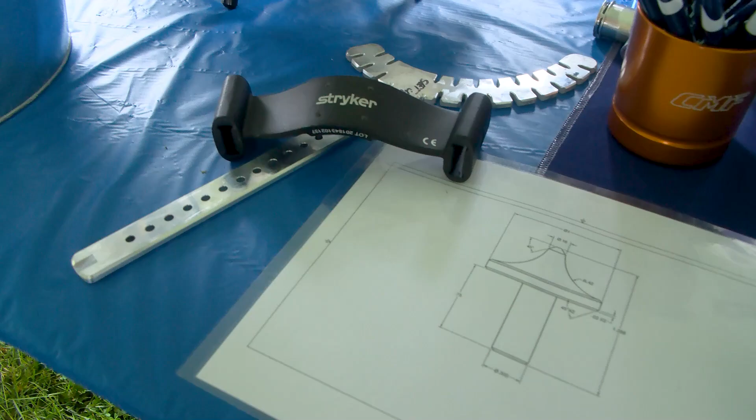Can you talk about some of the cool stuff you have here on the table? A lot of what we do is very tedious work. We do everything from Stryker with medical down to like Eaton Aerospace.

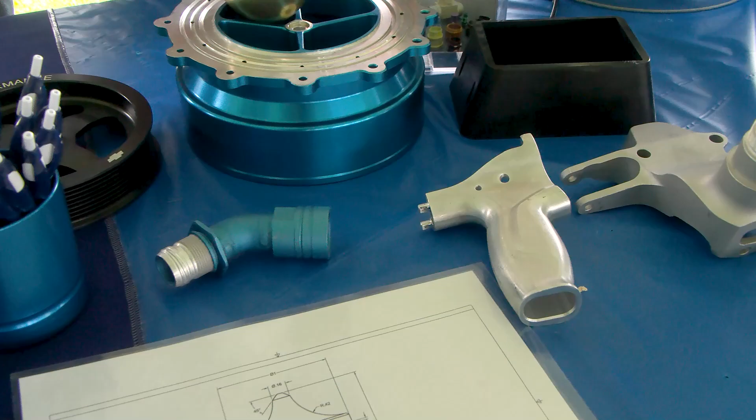Another cool company here is Jet Heat. We machine parts for their jet heaters, but we do a big variety of different parts for the companies we work for.

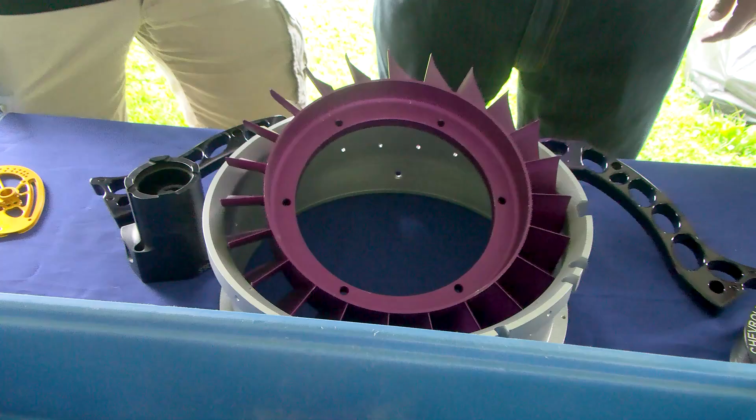Thanks, Colton. And now we are here with Mary from Technique. Mary, you want to tell us a little bit about yourself and Technique?

I've been with Technique for about 8 months now, and we are an emergency manufacturing and prototype facility. We work in metals. We have so many training opportunities at Technique. We are currently hiring for many positions. We're going to be opening a new facility at the end of the month and building a new facility in the spring.

How many people do you plan on hiring? Well, we've hired 50 in the last 2 months. We plan on hiring 50 more, I would say, in the next few months. We're hiring welders, machinists, prototype techs. We're looking for a CWI certified weld inspector.

So if you know of anyone, it's a great place to work. We have so many training opportunities. We pay for your training. We'll put you through our TechU academies. We hire high school students, juniors and seniors. Love to start you in a new manufacturing career.

So tell me, what makes it important for you to attend events like the Learning Fair? We love to introduce manufacturing to kids. I think a lot of the kids, especially in the urban areas here, aren't exposed to manufacturing, and they don't even know that this stuff exists.

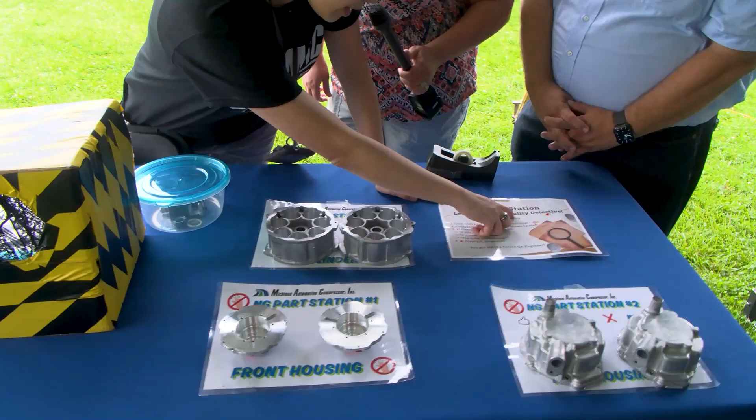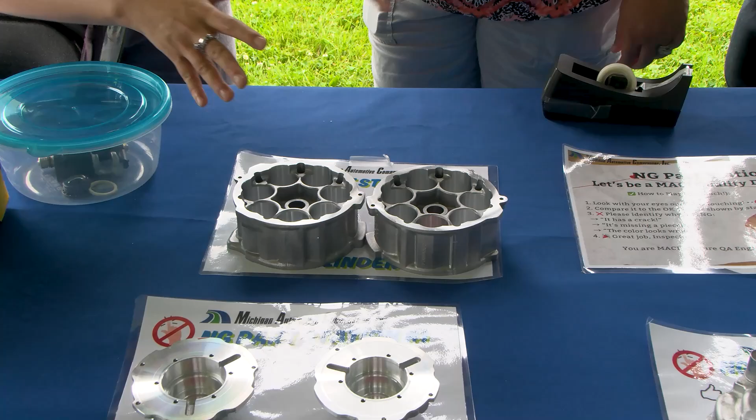Awesome, so I see you have some parts here. Are you able to tell us a little bit about what these parts are? Oh yeah, they are. This is a quality detective activity. One side is the bad part, which is no good, and the other side is the good part. So kids get to compare and identify why they are bad.

All right, Olivia, the real test is, can you choose which one of these parts is good or bad? So this is bad and this is good. Yeah, I was going to say this doesn't look great. Uh-oh. We get to hold up, welcome to MACT! I get to hold up the frame now, right?

Yeah, okay, so now she... and safety first. Uh-oh. Perfect. Well, thank you, thank you.

Thank you so much. We're here with Mark and Fred from the Model T Experience at the Learning Fair at Northwest Elementary. Gentlemen, thank you very much for agreeing to appear on our podcast. Welcome, yes. So could you tell us a little bit about what the Model T Experience is?

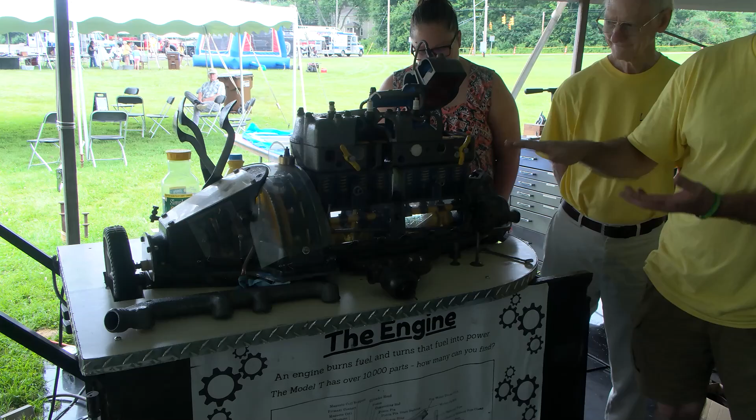What we're trying to do is teach children about manufacturing, building things through hands-on work from the original manufacturing device, the Model T. This is a real engine from a Model T, 1908. This is a 1909, right? Actually, this has got some parts from both of them, but it's a cutaway engine, the real thing, so you can see inside how an engine actually functions. A lot of people don't know how an engine functions, but it's really quite simple to relate to children.

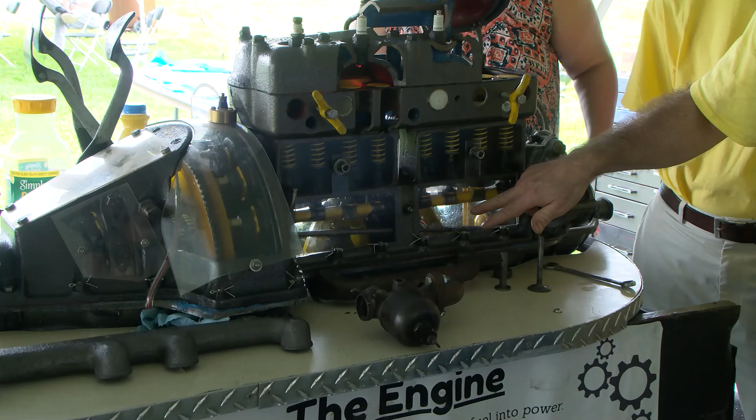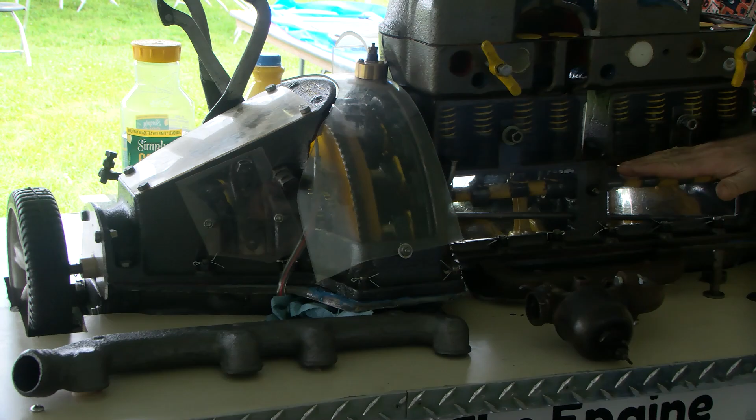If you look inside here, you've got that yellow part that's moving up and down, that's called the crankshaft. Children have generally ridden bicycles, so that would be the pedals of a bicycle. The pedals move up and down, spinning around, which eventually goes through the transmission to move the wheel. On a bicycle, you have a chain instead of a transmission, same concept. So if you think of this part as the bicycle, all of this is the rider, and this is where the power comes in.

So on this engine, it's 4 cylinders. We have one cylinder here, this piston, cylinder, cylinder, cylinder, and it's a 4-stroke, that's how it functions. We've got 4 steps in how it works. You start with step number 1, here we'll come around. This valve comes up, letting fuel and air in, and it closes, comes up, and the spark plug goes off, exploding the gasoline, pushing it down, like your foot would push down on the pedal. Come back around to here, step, bang, push, and then the exhaust comes out. Same as you, breathe in, breathe out, food in, waste products out.

Same function, and in fact, gasoline is a hydrocarbon. The food you eat are hydrocarbons, and you breathe out CO2, so does an engine. Plants eat the CO2, and it all cycles around. Now this has got lots of parts and moving parts, you can see things that are functioning and how it all works.

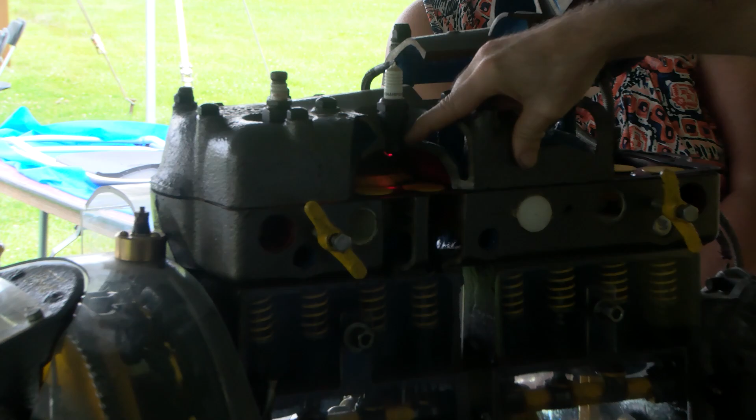Now there is one interesting part, though, that's very different from a person, and that's the spark plug. Your body consumes food and turns it into energy a different way. This works—you get gasoline in and oxygen, and when that spark goes off, bang, it explodes and pushes down on the piston. Now in order to get the spark, we need electricity, and that's what this part does here. This is called a magneto.

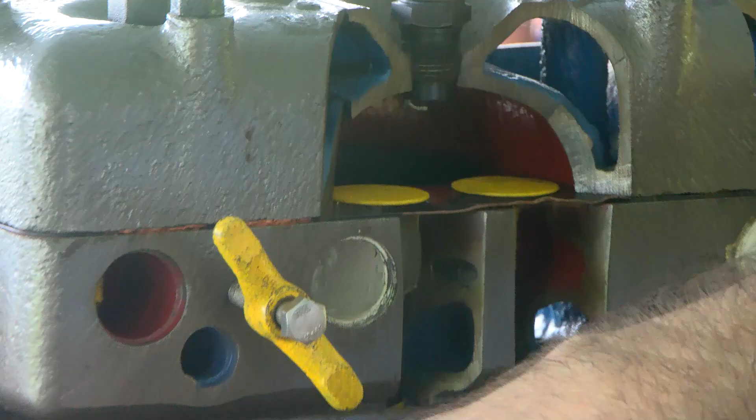We don't use these anymore in engines. We have an alternator now, but essentially it's the same concept. This spins around to make the electricity to run the spark plugs.

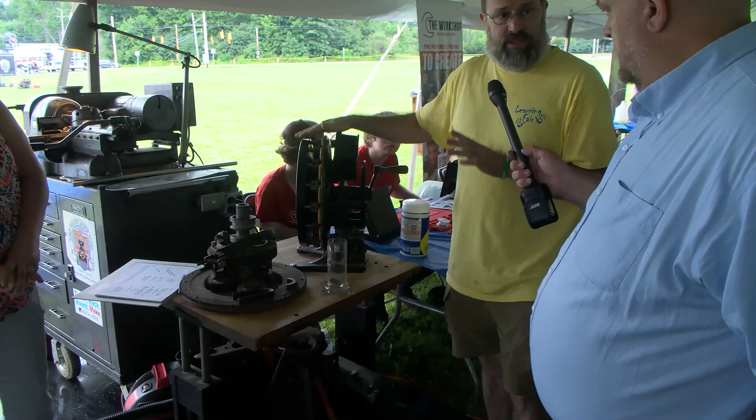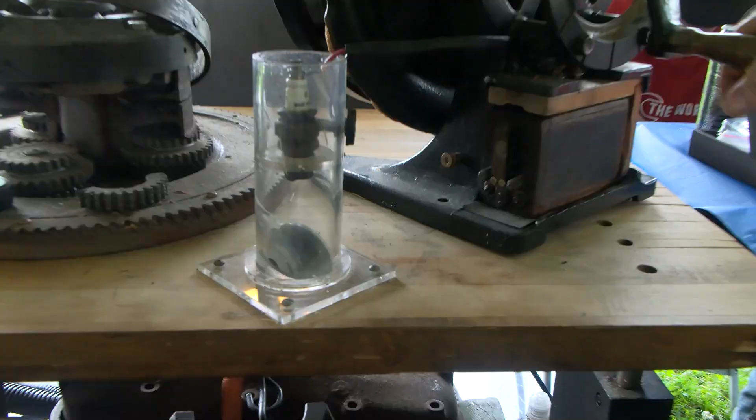All of these parts you're seeing here were actually used to work on these engines. These are real things that were used to make real vehicles. This is a tester for this part here. If we give this a crank, you can see it gets up to speed, and you can see the spark plug sparking. Wow, that's really cool.

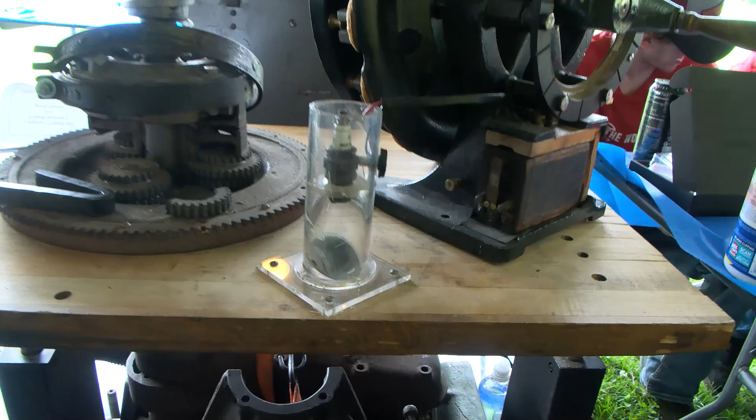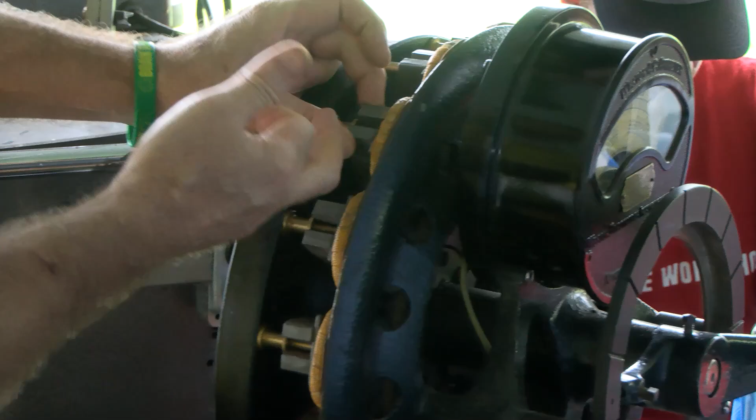The way this works is you've got a coil of wire and a magnet. When you move a magnet past a coil, that induces electrical current. Now, to get this to work properly, that magnet can't be too close, or you'll just grind the parts. But it can't be too far away either, because it won't interact. That's what that part right there is for. That's a magnet standoff, or it's called a magnet support.

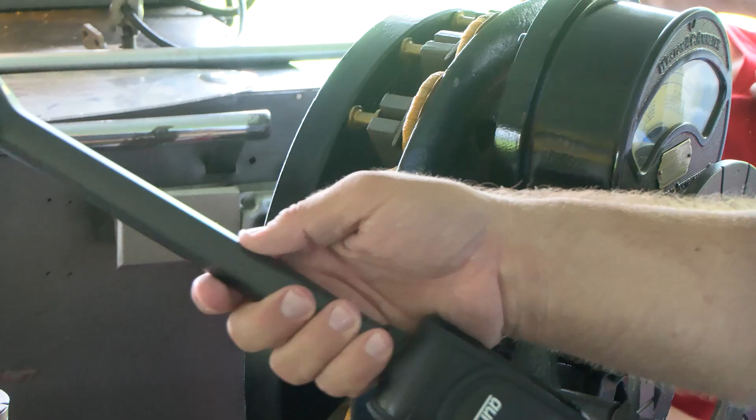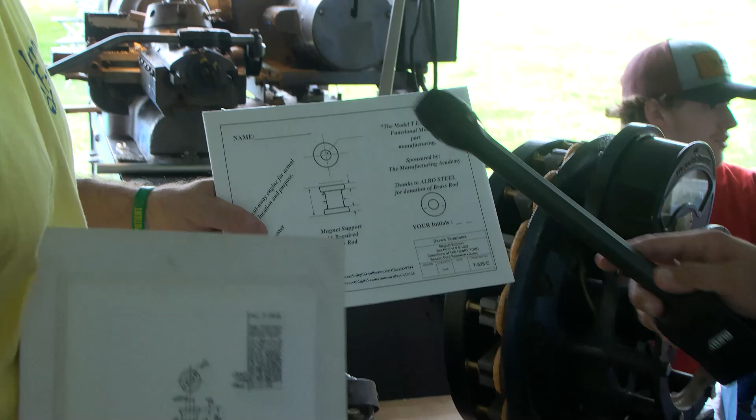Here's the actual drawings for the design of that. You can see that measurement right there has to be plus or minus one thousandth of an inch. If it's too close, it's going to hit. If it's too far, it's not going to work. So we have the kids write down and draw out their parts and that measurement, and then we have them make the part and measure it to see if they did it properly.

So this is what's called a turret lathe. Now, if you use a saw or a knife, you move the tool to cut. On a lathe, you move the material instead. This material is sticking through the lathe, and these are all the tools. It's called a turret because this spins around, turns to change tools.

So I'm going to move this around here. We're having a little problem with this piece. Okay, so we push it forward, bring it in. This is not a real tool, so we're going to skip that one. Move it, push it all again, bring it back. Okay, now this is the first stage of the tools.

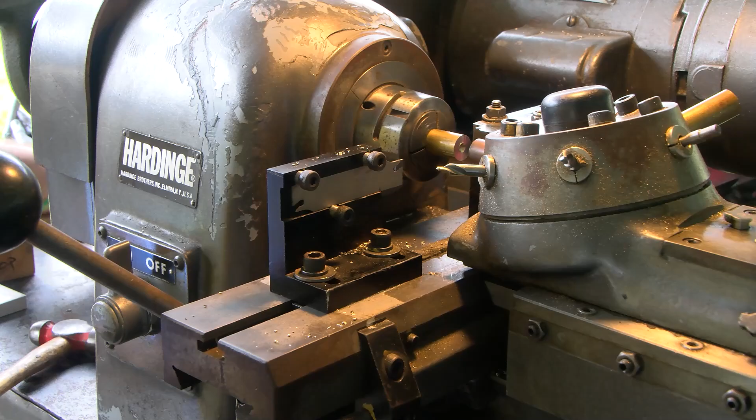At this point, that's the measurement tool. So we're going to bring that there, hold it. Then this has got to be pushed through here to get to the right size. So now it's measured, and I lock it in place. Should do better than that, but it locks in place.

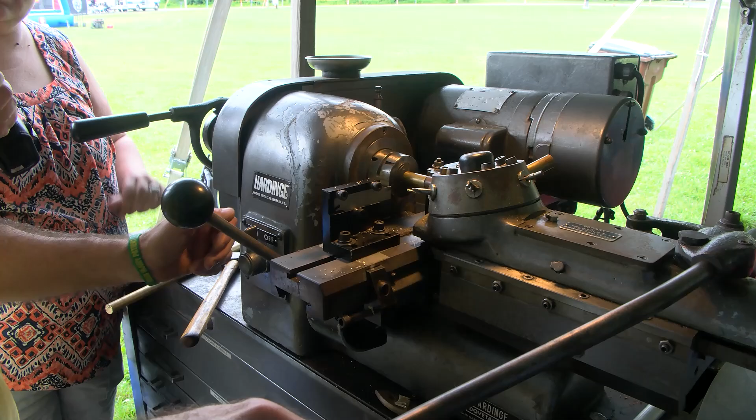Now we're on this next step where we would turn this on, which we're actually going to need to have some people with some glasses on to do. You're probably okay over there. Sure.

All right, so bring this back. First tool here, we're going to do a pilot hole. That brings that in, starts the pilot, and then the next stage clicks over to the next tool, and we're going to drill the hole. When you're drilling, you've got to let some of the chips out so you don't put it all in at once. There we go. Next stage, bring that in to catch this.

Let's go hold that. Next step, we're going to zoom in real close on this. This is the exact shape of the part which we're going to make right here, and that's going to cut that shape. Now it's going to make some horrible noise here.

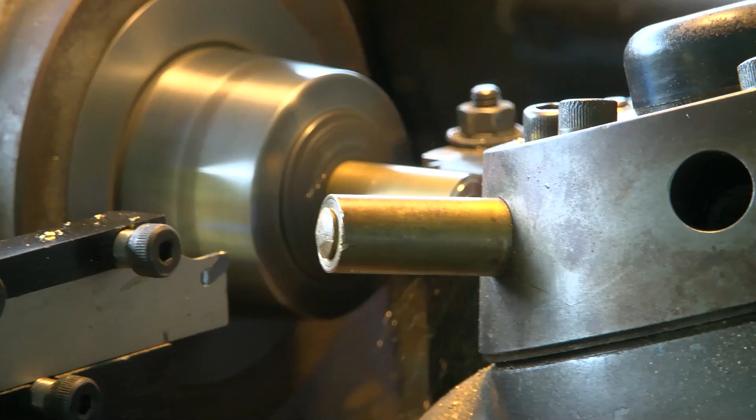Now we cut that part, and now we're going to trim that part off, push it forward. And there it's off, turn it off. I got to grab this with... they're over here. It's going to be real hot, as it was friction. Drop that in there.

Pull it out. There's a sharp edge left over there that we take off. You can see there's a lot of steps to this. Okay, so what's this, not coming off? There we go.

And then the last step, well, not quite the last step, we have the children put their initials on there. What's the initials of your podcast? Manufacturing Matters. All right, MM. Real easy.

So at this point, you got to pull out some calipers. These are dial calipers, analog style. This is what they would have used. And the real key important measurement is this here. The way these work is you move it back and forth like that. We have to zero it out first, so we set this at 0.

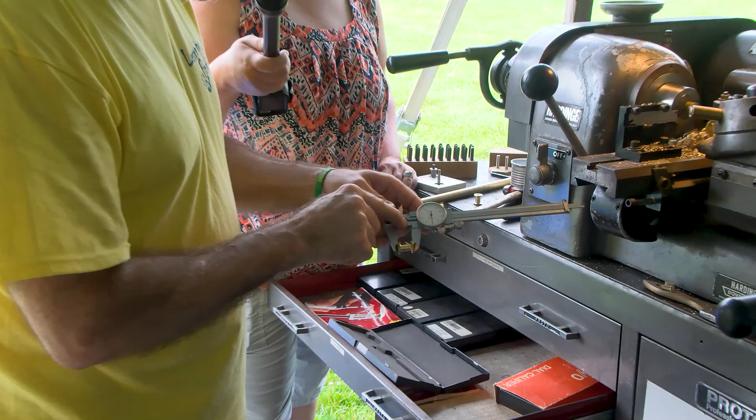Do it and get that there. And if you look in here, you can see that it's not quite 8, so that's 7.50, exactly, which on the specification there is exactly perfect. 750. So that's a perfect part. That's awesome.